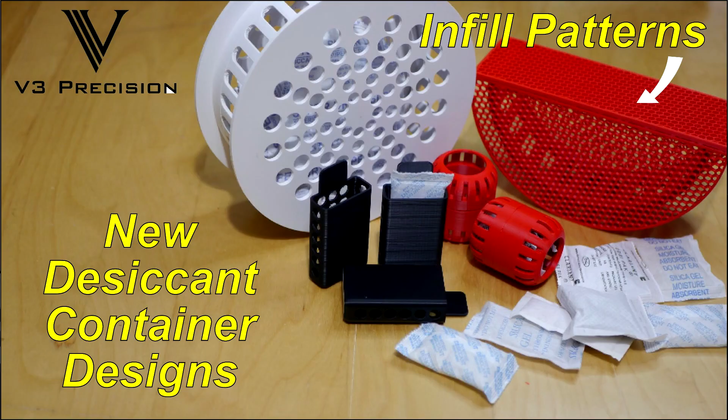I gave an example in a previous video, and this is almost identical to it, but as you can see, both sides are open, and you see the patterns there, and it's for a purpose. It's for ventilation. This will have a lid on it, and I put desiccant in there, and I can recondition it that way. The ventilation is part of the design.

You can model this up, and I use Fusion 360 like many of you do. You can model it up and put your pattern of whatever holes or clearance, whatever you want on there. And that's the way it will be when you print it.

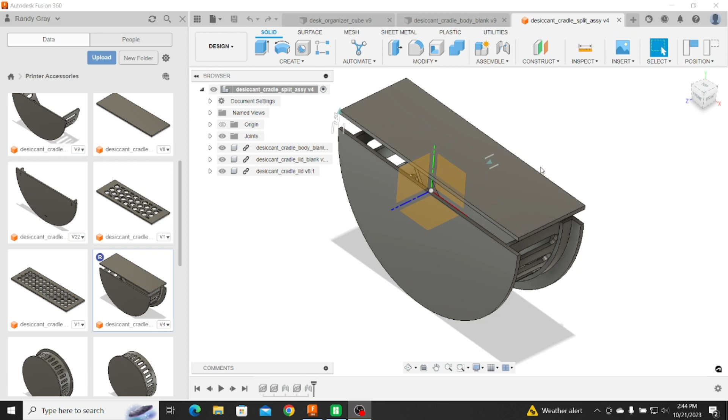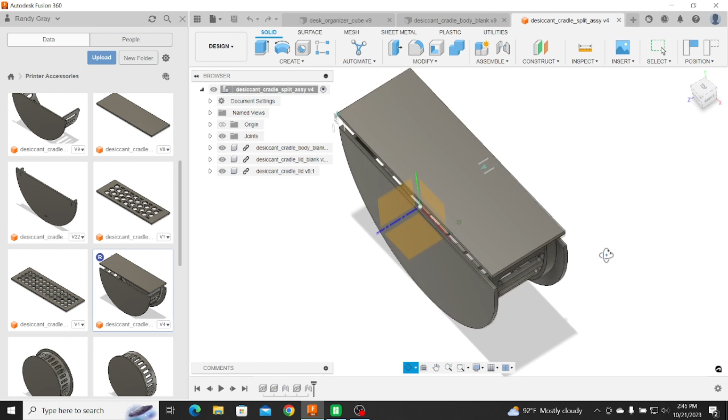Well, this way, if you're going to do it with the infill, let me show you. So you can see what I did in Fusion 360 here. Here's the assembly, and this is the cradle part. You can see with this, I have these three sides solid. Now I put my own pattern on this section of the assembly of the piece. Let's go over, and here's the piece. So what I did, I just made this a solid wall there.

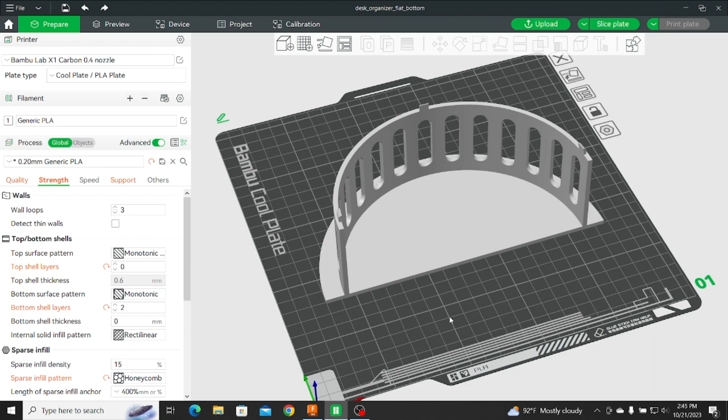So now, when I go over to the slicer, you can see it's showing up still as a solid wall there. And the trick is, on this one, I want it all the way through, just as that example that I showed you. You can see I set the top layer here to 0. The bottom layer, let's go 0. And infill density, let's leave it at 15.

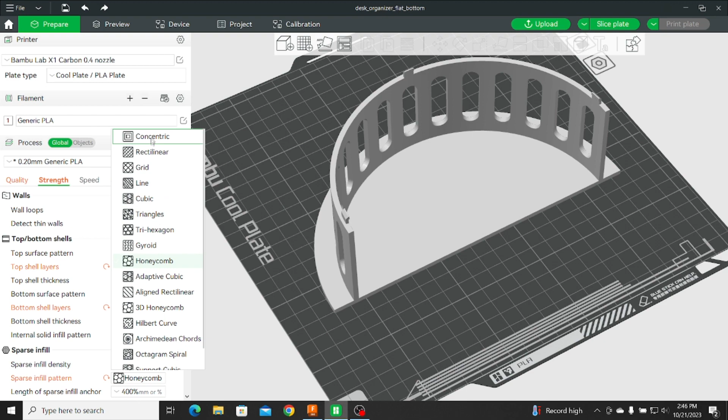And it's on honeycomb, so you have your choice of whatever pattern you want. I'm going to stick with honeycomb for now at 15%, and let's slice it. So you can see the pattern shows up, and with the top and the bottom layer turned off, all you see is the infill.

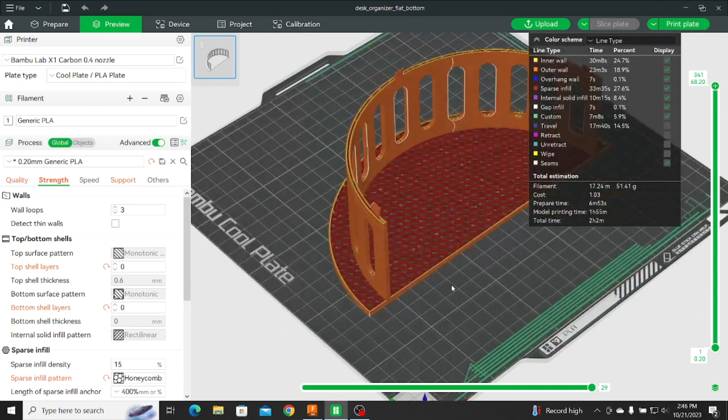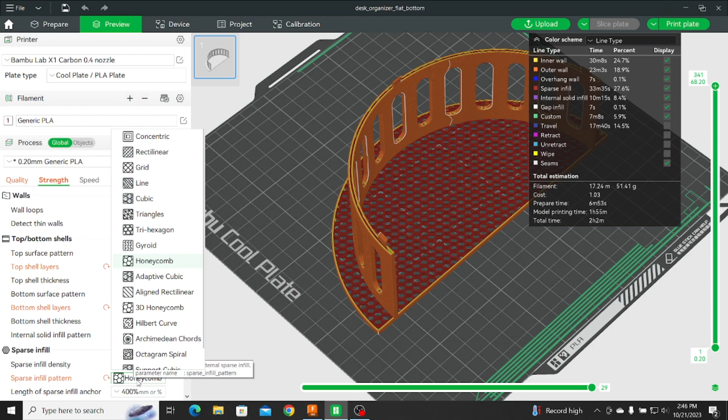So with this way, instead of modeling it in 360 and having your own pattern on there, it stays that way all the time. And this way you have your choice. Let's go back, let's try gyroid at 15%. There you go. So you still have your ventilation, it still works the same way.

And that way you have your choice of the size and pattern that you want. You're not stuck with whatever pattern you modeled into it in Fusion 360.

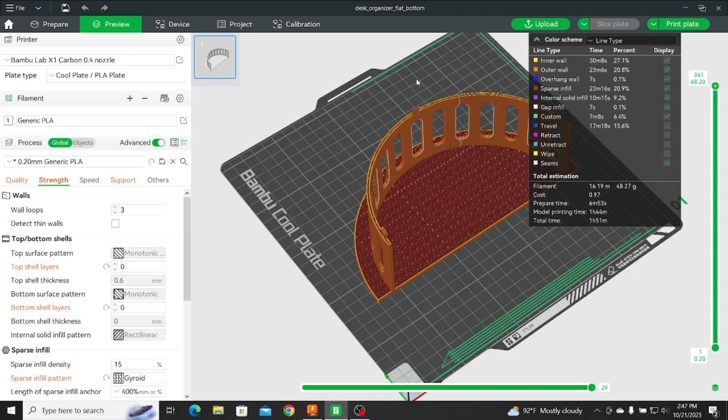So here's the next example. This is a desktop printer organizer, to put in all your tools and pens and Sharpies, whatever, glue sticks, whatever you want in there. And you can see it is modeled the same way. It just has a solid bottom on it.

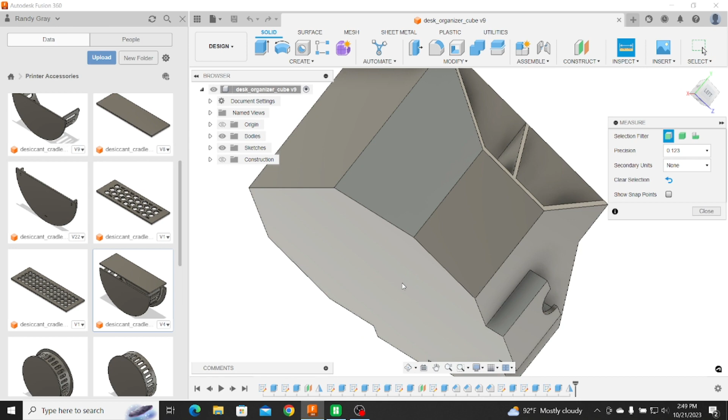Now this one, let's take a look at, I forget how thick I made this. Yeah, 0.178 inch thick, so it's kind of thick. But I did that for a purpose. So when you take a look...

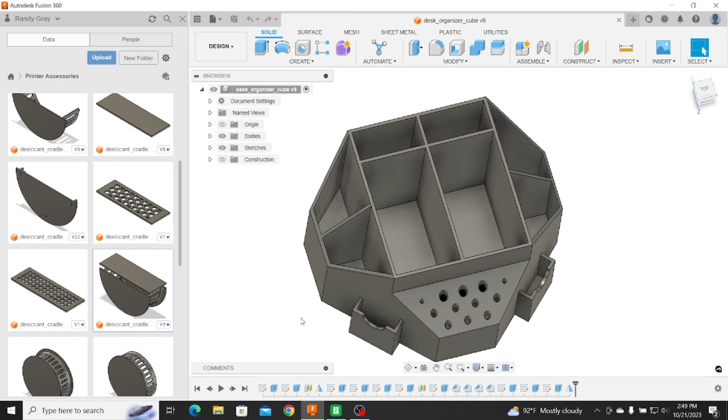Now I could have done the same thing. I could put my own pattern, whatever I want, and it's going to be there whenever I'm ready to print. It's there. But here it is on your slicer.

Now the same thing, but what I want is open on the top here. I want to be able to see that infill pattern, but I want an enclosed bottom. And the reason I want that, you can see my little tool holders here for Allen wrenches. When I slide that Allen wrench in with the pattern there, it will insert and drop into it, so it won't just slide around.

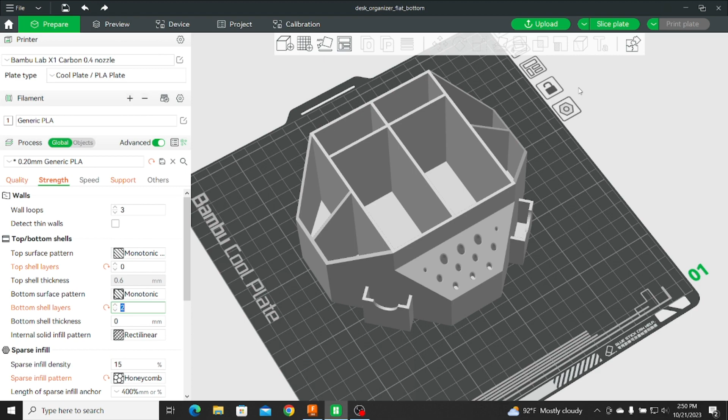If that makes sense. But let's go through here, and here's the top layer. We'll go to 0. And the bottom layer, I'm just going to have 2, it doesn't need to be that thick. And honeycomb at 15%, I will leave it there. And there we go. So there's our pattern.

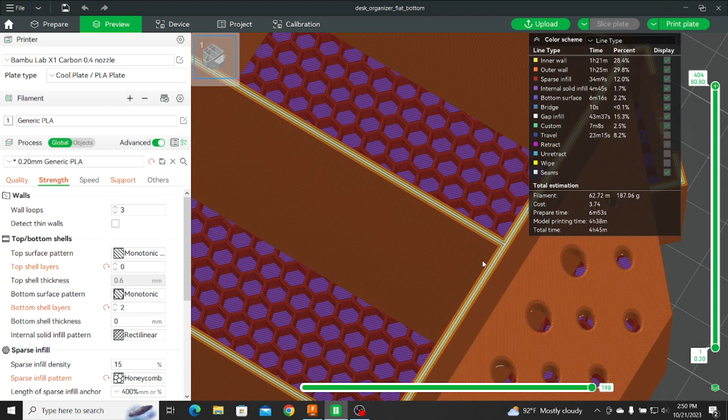So now you can see whenever I drop an Allen wrench down in here, it falls into one of the cavities and it just won't slide around. Same thing with pens, or if I have an X-Acto knife and drop it in, it's not going to fall around. It's going to drop into one of those little cavities, and it's still solid on the bottom.

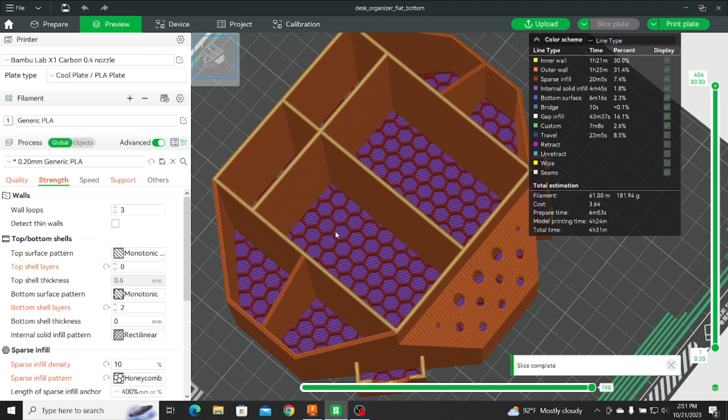And once again, if I decide I want a larger percent or a different percentage, well, I can control it right away instead of having to go off to Fusion 360 and change the model. Yeah, the model's already there. All I'm doing is just changing here.

Well, that's kind of cool, isn't it? You can use the infill as a feature in your design. It's not just infill within the part.